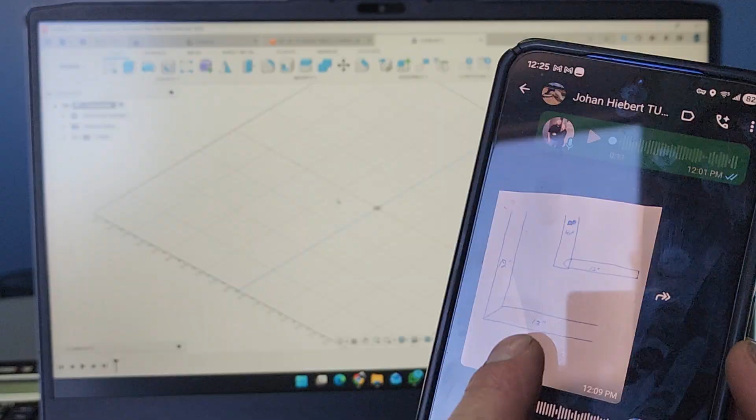Alright, so in this video I'm going to show you how to make a tube notch for the Martens CNC pipe profiler or tube cutter. So let's say I have a customer, he wants a 90 degree for a 12-inch pipe. He just wants it 45. So we're going to cut that and then do another one where the 12-inch pipe goes on to a 16.

So one option is we can go in Google and type in tube notch calculator, and then I just put it in as inch. That way it'll give me the right one right away. And I scroll down here and I go to blocklayer and then pipe notching templates and then inch. And then here I can actually just get the tube notch out of there.

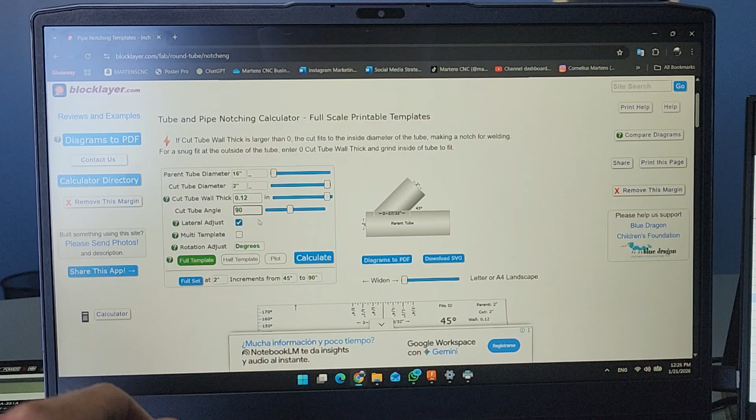So the parent tube is this one there. So let's do the second one I had, the 16 inch, and we're just going to do this one at 90 degrees. The second one that I showed you is going to be this one right here, a 12 going on to the 16. The 16 is the parent tube. So we're going to do 16, and then the second one is a 12 inch. So we're going to type that in there and then hit calculate.

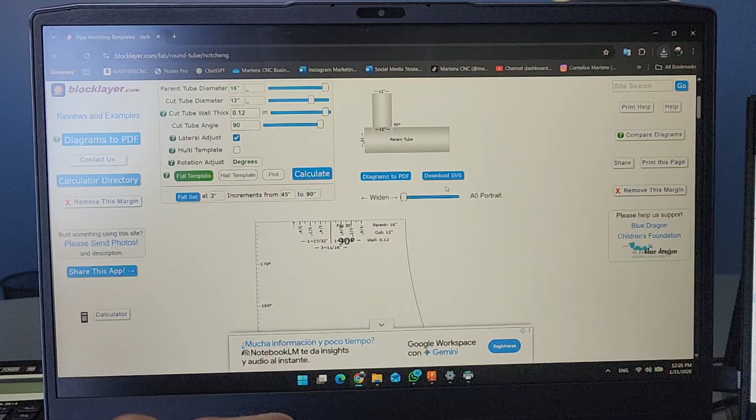Look at that. Okay, there we have the notch. So what we're going to do is download SVG, click OK. Let's see if I can scroll down here and download it. Usually it comes on the bottom here. I think we'll use the SVG. So let's just do a 16 inch by 12 inch tube notch. Just call it that. Okay, there you go. I downloaded it.

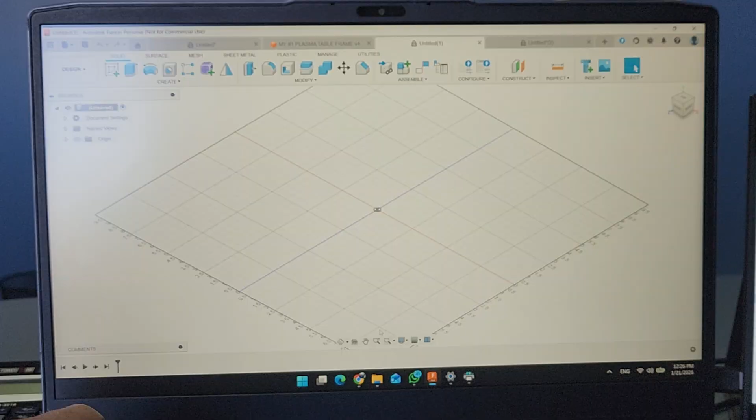Now we're going to go in Fusion 360. I'm going to go insert SVG, so we're going to go insert from computer. Then we're going to go to our downloads, then to the 16 by 12 inch. I'm going to click on the surface we want to put it on. I like to rotate it down this way, up. There you go. And then click OK.

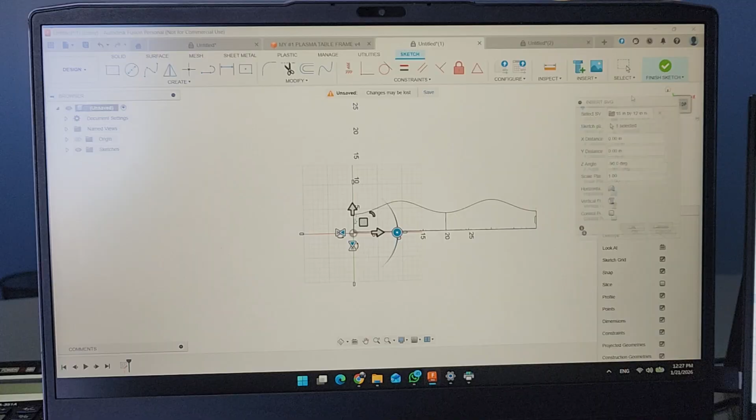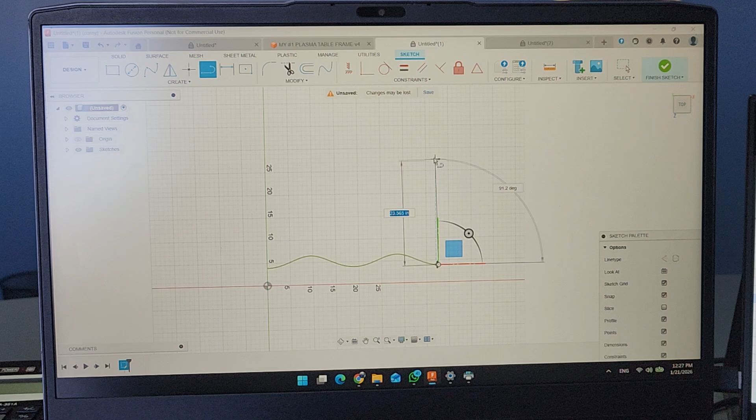Now I'm just going to delete all this extra measurement stuff on here. So this is one of the options. You can also draw all this in 3D and do it like that. But this way, now we have that tube notch and it's ready. So if you're going to do a whole tube, what you can do is just put a line here. What I like to do is put it all the way in the edge, and then let's say you want a 40 inch. So I'll just tab at 90 degrees, and if I want 40 inches, I'll do half of that. So that way I got the middle there.

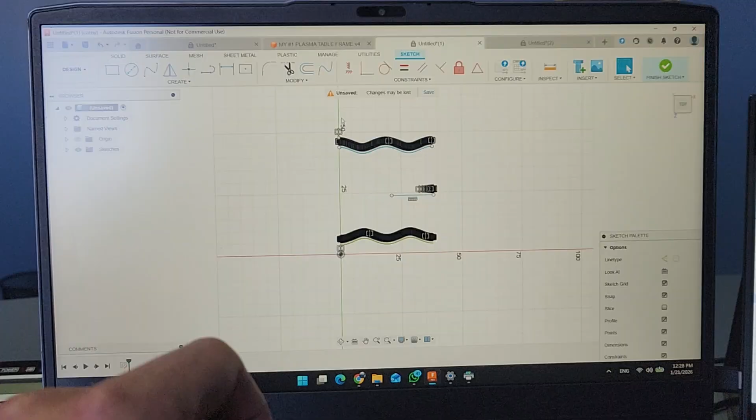And then I do another line. I don't think it's at an angle, but that's okay for now. And we'll just put another line, and then I delete this one. Then I'll use the mirror feature, take this, select the mirror line, and it will mirror to the top. And now you have a full notch pipe there. It's showing all these constraints, but you can just uncheck that over here if you want to take those out.

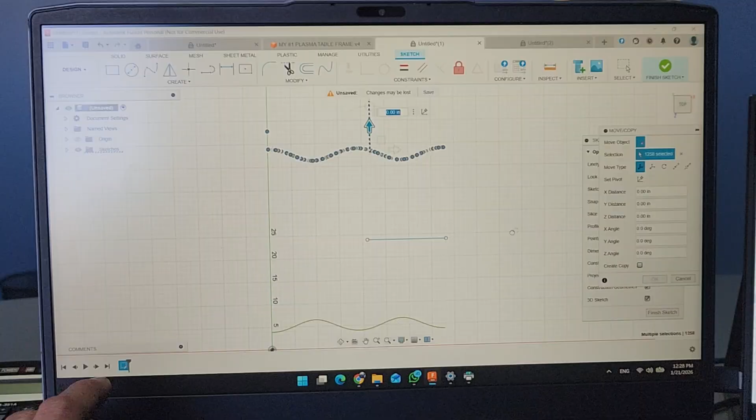So you can just measure, let's say you want the inside to inside to be a certain amount. Let's say this is actually 34.8. So if it's not right, you can just slide it. You can move one or the other. You can select it and then just click move and copy, and then you can move it an inch up or whatever you need to do. Let's say you want it 1 inch up. You set 1 inch, and then it'll jump up an inch.

All right, so we just have this plain piece here. So I'm just going to export it as one sketch, but you can flip it to where you have the pipe that you need. And then we're just going to go over here to sketch and then export DXF. And I'm going to put it in inches. And I click OK.

I'm going to go to my folder. I think on my desktop I have a folder where I put them in. There it is, pipe profiler. So let's say this one is actually for 12 inch. I'm just going to put a folder: 12 inch casing.

So, 12 inch notch to 16 inch pipe. Save it just like that. There you go. Now we have that saved.

Now what we're going to do is we're going to go into SheetCam, and this is where we're going to post-process the file and then send it off to the machine. Okay, we're open. Gonna go up here to File. We're gonna click New Part. Then we're gonna go to our desktop. We're gonna go find our casing. There's a 12-inch casing. Here's our part that I stuck in there.

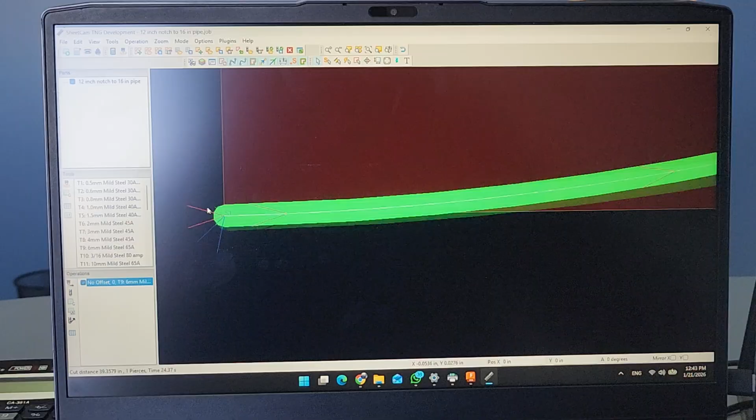And then I don't think we're gonna do any lead-ins on these, so just directly cut path, start position back there. So you can change the cut position if you're gonna start on the top or on whichever side. I'm gonna start here. There it is, boom. So it's gonna start here and it's gonna go through and finish it. If you want to look and see how we'll cut, up here we have a simulation right there. Hit start.

And if you click the wheel on the mouse, you can actually rotate it. You can see the torch. You can see how we'll cut. So that's all good. I'm just going to go back to edit contours, and then you can go back to this view. Now that's good to go.

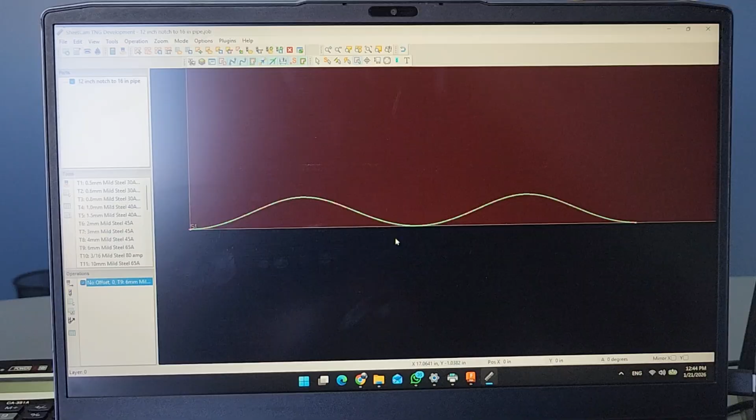Now we're going to go up here to export, and now I'm going to just export it to desktop. Let's see, where's the files? Pipe profiler, casing. SheetCam, casing, pipe jobs. I'm just going to put them in the DXF back in the 12 inches, just a tap file, so this one's ready to go. So stick it right back in there, it's ready to complete, and now it's ready to send off to the machine. So we're done with that one.

And then the other one, we're gonna go back here, and this one's gonna be a 45 degree. So 45 degrees, and it's just gonna be a 12 inch parent tube, and a cut tube is gonna be 12 inch. So calculate that and then done. So that way it'll cut the end off there. Actually, we're gonna calculate so we'll go in the end. So I actually have to go to a different one.

So actually on this one, we're gonna go to tube pipe miter templates. Because we're gonna do the end pipe, this is not a notch, so this is a miter. So on this one, it's gonna be a 12 inch and 12 inch even. And so you wanna do angle join, 90 degree join. So that's gonna be just like that. And then calculate. There it is. There we have it. Okay, so now we have the file there.

So we're going to download the SVG. This is 12 inch, 90 degree pipe miter. Okay. So I'm just going to save that pipe miter. Just going to put it on our bookmarks there. I'm going to do tube cutting folder. Save it in there. There you go. So do this one as well. So yeah, we have those files.

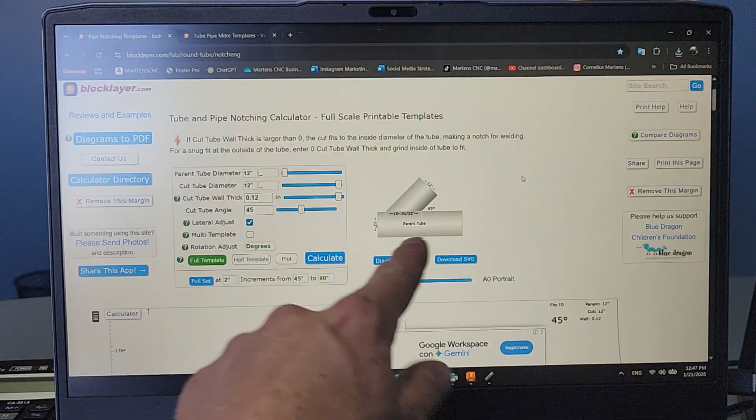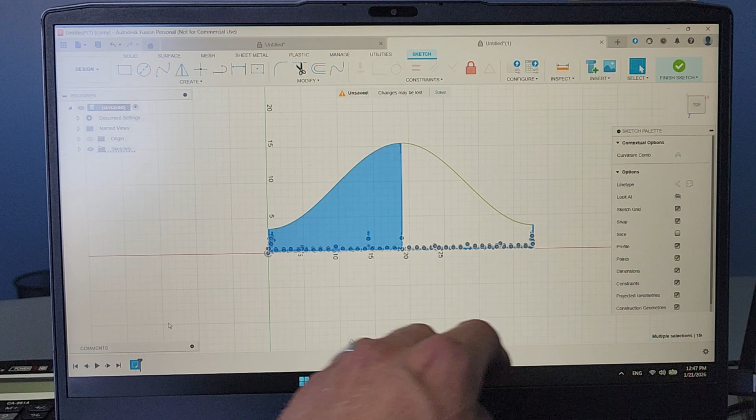So now we're going to do the same thing with this one. We're just going to insert SVG. We're going to insert from computer. Downloads. 90 degree, click open, download, rotate it, and we'll do the process all over again. It's going to go ahead and delete the parts that we don't need, and then ready to go. So the process from here on out is the same as the other one.